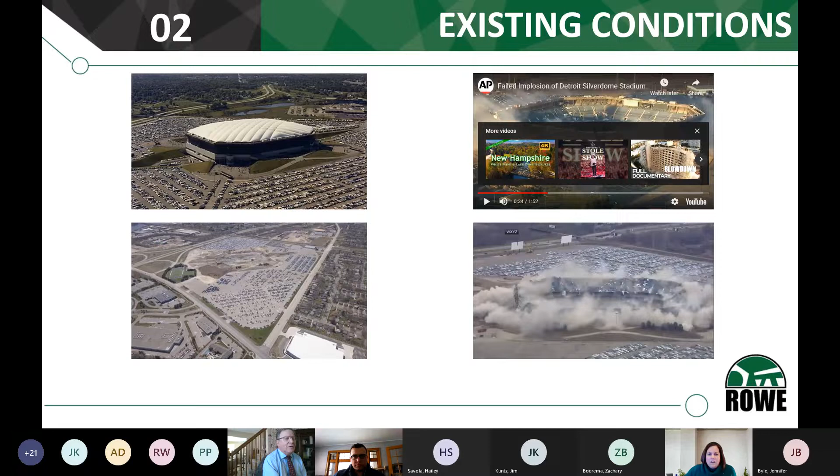But the second time around, it fully imploded. And a little fun fact here, I don't know, can you hear me Jill? Yeah, okay. Something for everyone to note: look at all the cars in the parking lot while they're blowing that up. Those cars happen to be the Volkswagen recall cars, the ones where they violated the emission standards. That's all of them that they brought back from people. So maybe they didn't care what happened to them if they got a little debris on them.

Yeah, so a few more fun facts: the Silverdome did open in 1975 with a capacity of 80,311. The roof actually collapsed three times, once in 1975, 1985, and then again in 2012 before it was demolished.

And the Silverdome, this is actually a pretty timely fun fact: Mr. Tom Brady's first NFL appearance was there. He went 1 of 3 for 6 yards, and the Lions ended up winning that day 34-9. Things have turned around for him a little bit in the past few years, I guess. The Lions were 116 wins, 92 losses, and 1 tie when they had home field advantage.

There was a record attendance of 93,682 people during a mass performed by Pope John Paul II. And the Silverdome did host Super Bowl 16 in 1982.

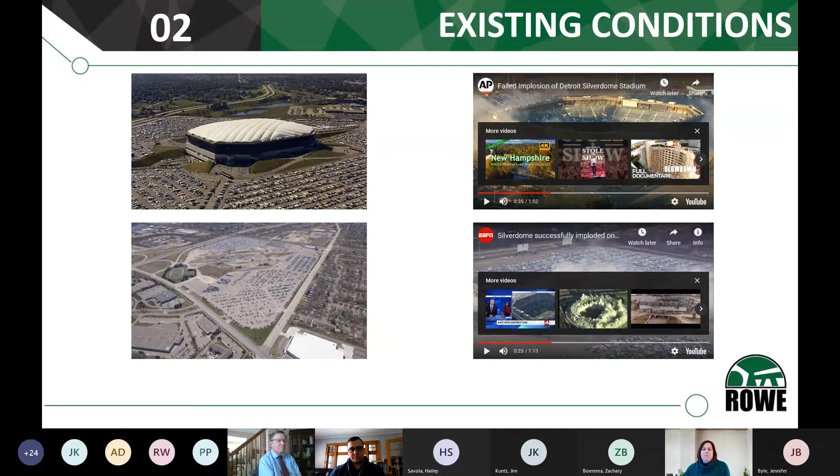But moving forward, after the implosion the proposed development came in, titled Project Cougar, which turned out to be an Amazon fulfillment center and delivery station. You can see here the fulfillment center and delivery station on site. This was the first time both facilities would have been constructed on the same site.

There's 823,000 square feet for the fulfillment center and a 200,000 square foot delivery station. This site is expected to generate over 1,500 jobs. Yes Joe, the fulfillment center is three stories, so it's correct, 3 million something - that's just the footprint, 800,000. So here's a little vision of what it was going to look like once it was developed.

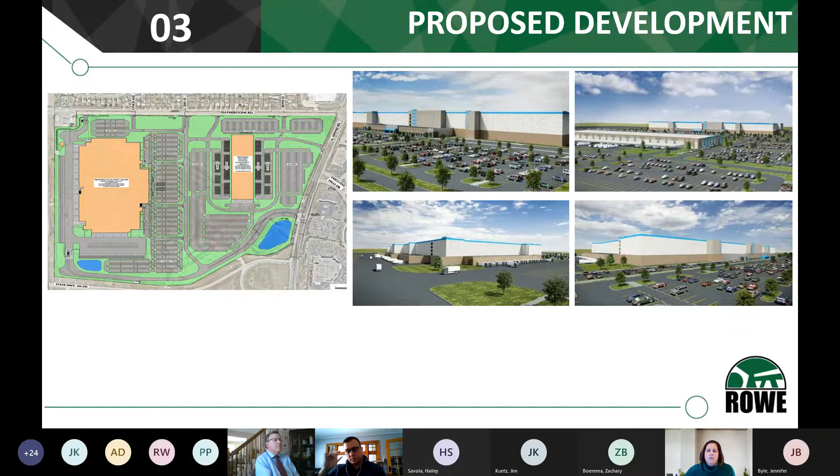So we were tasked with creating a scope, and this happens to be a pretty unique site as it sits along M59 in Oakland County. Opdyke Road runs along one of the frontages, maintained by the Road Commission for Oakland County. The city of Pontiac is where the site is located, but just across the street is the city of Auburn Hills. So some of these intersections had multiple agencies with interest, and we were talking to the Michigan Department of Transportation, the Road Commission for Oakland County, City of Pontiac, and City of Auburn Hills.

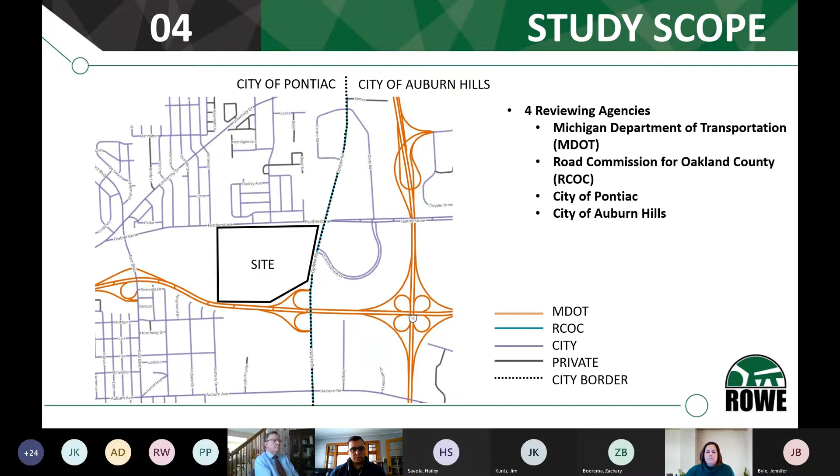So we ended up developing our study intersections, which ended up being 19 intersections in total, 5 of them new site driveways. We were looking at the Opdyke Road corridor, just south of the M59 ramps, north of the intersection with Featherstone, along the Featherstone corridor, and also the Martin Luther King Jr. Boulevard corridor, taking into consideration the ramps at M59. We even extended along University Drive to where M59 ends up becoming a local road going into the city of Pontiac. So it was a pretty large study area for this.

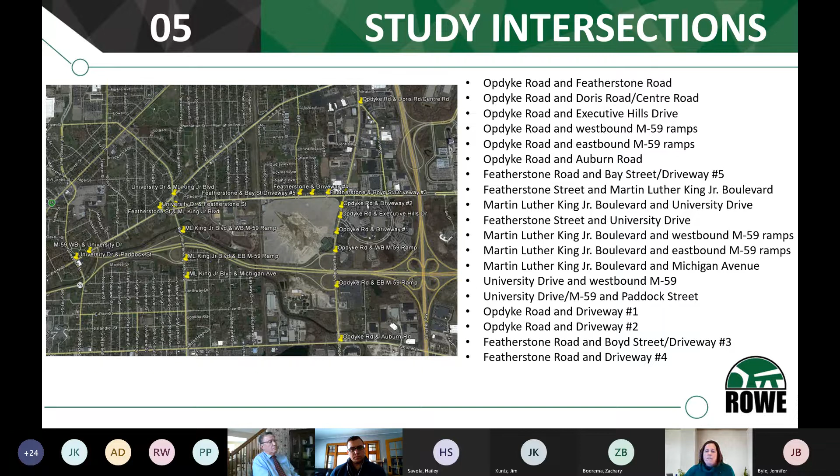There were some unique elements. When we were out there collecting our traffic counts in August of 2019, there was construction on I-75 and the M59 ramps. Those loop ramps were closed all summer, so that meant different traffic patterns.

The Road Commission for Oakland County uses the SCATS system, which stands for Sydney Coordinated Adaptive Traffic System, which allows them to collect traffic data every day, all day long. So we were able to go back and look at intersection data from May of 2019, which we could then compare to the August counts we had taken, and see where some of that traffic balanced out and where there were impacts. The eastbound off ramp onto Opdyke Road, for example, had a significant increase in traffic that we knew would change once those loop ramps were open.

This was the first site for Amazon that had both a fulfillment center and distribution center on the same site. So there were a lot of reworks of how those buildings were going to be laid out on site and how traffic was going to be coming in and off site.

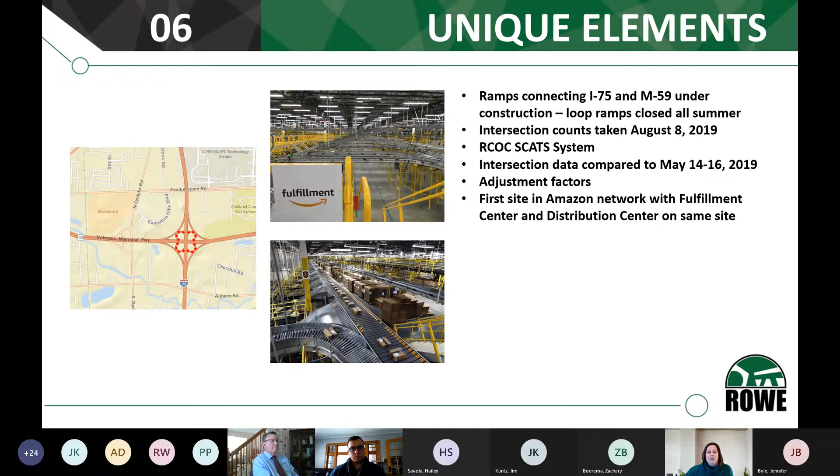Because Amazon is the beast that it is, and they have these facilities all over the country, typically we would go through and use the ITE trip generation manual, which has followed various site studies over the years to develop their trip forecast. But in this case, we were supplied information from Amazon because they have their own charts based on similar facilities.

They're very strategic about when their employees are coming in. They make sure their trucks are not also scheduled to come in at the same time. They want to make sure their employees are getting to work on time and leaving in a timely fashion, so they'll do some of their own on-site traffic management to make that work out better. They provided us with their peak and off-peak hours as well, and they try to avoid that roadway peak hour, so they have employees entering and exiting outside of your typical 7 to 9 or 4 to 6 peak hours.

So we took a conservative look at this. We wanted to look at the worst case scenario, and we also made sure to look at that holiday peak, which they see from November to January, just to make sure the improvements we would propose would still be able to handle that traffic.

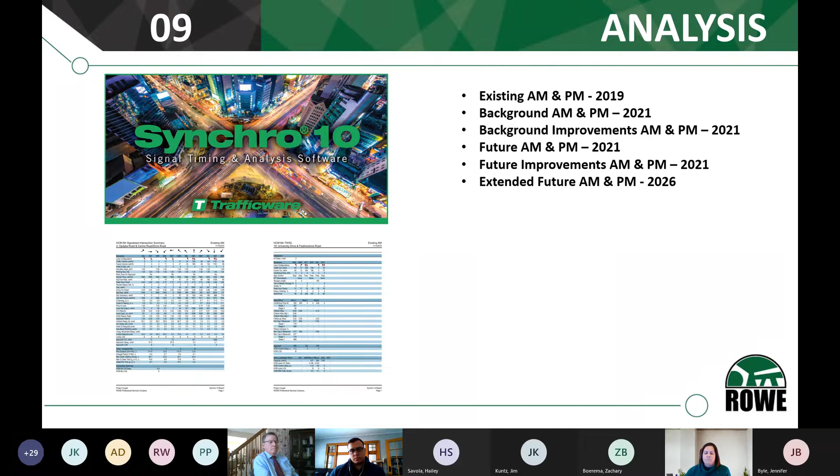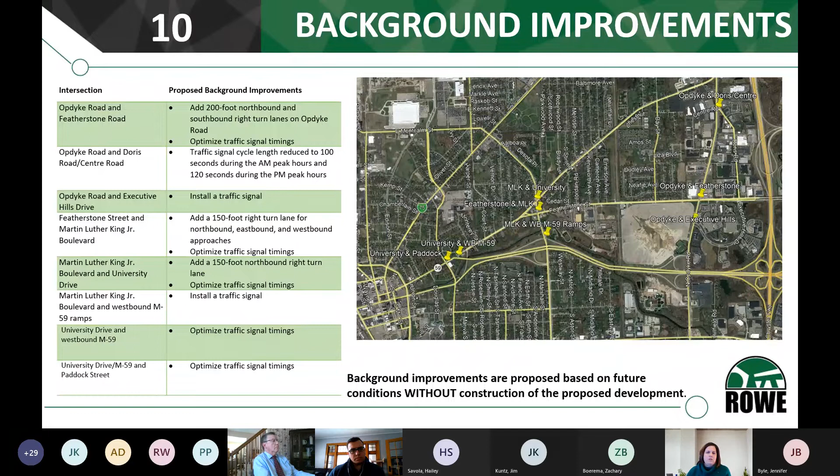Then we moved on to our future improvements. Once construction was completed and the development was done, we considered that those background improvements would have already been implemented. In this instance, there was signal optimization needed at some intersections. We had a proposed widening on Opdyke Road to allow for dual lefts into the site, a traffic signal at the main site entrance on Opdyke Road, and another proposed traffic signal at the site driveway on Featherstone at Bay Street.

There were also proposed alterations to the M59 ramps, with changes in signalization and a widening of the eastbound off-ramp, since a majority of that traffic was going to be accessing the site from that ramp.

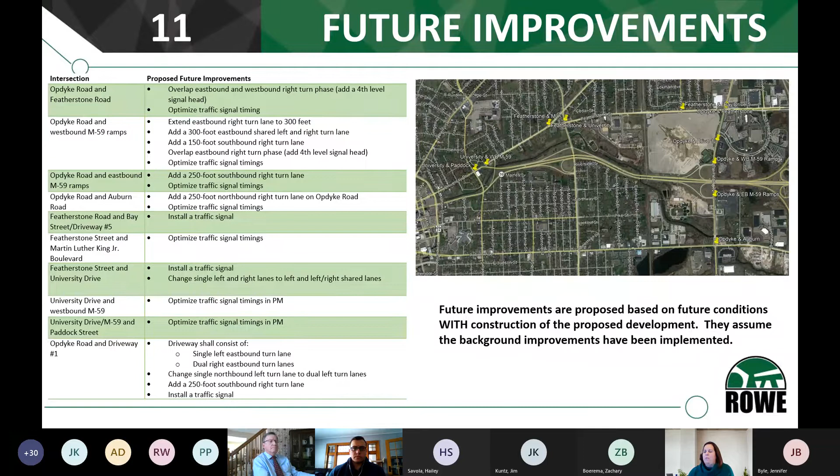This made for a bit of an aggressive construction schedule, working with 4 different agencies who had input on things they wanted addressed. With the city of Pontiac, there were pavement improvements done on Featherstone Road. Even though the project wasn't within the city of Auburn Hills, they share right of way at the intersection of Featherstone and Opdyke. Having MDOT and the Road Commission review the improvements and construction plan didn't make for a lengthy review process, but there were definitely some interesting conversations.

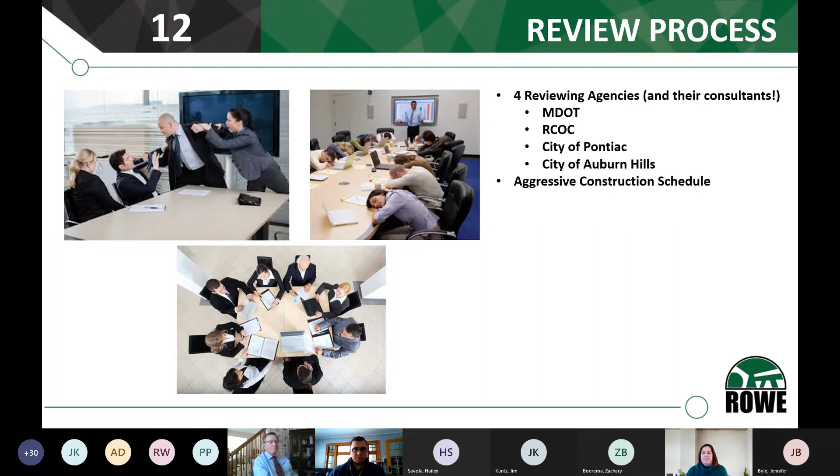In the end, the project was approved. We were able to come to agreements with all the agencies.

Even though our traffic data collection happened during large construction projects, this actually helped us this past year once COVID came around — we ended up applying a lot of the same ideas, looking at other developments where traffic volumes were much less than what had been seen in the past, and wanting to plan accordingly for when those volumes get back to pre-COVID levels.

It was definitely an aggressive construction schedule. They're still working towards it, with a couple of signals left to be constructed as part of this project. It was definitely a one-of-a-kind facility, working with the trip generation being provided by our client.

There were some site layout restrictions when they were trying to lay out those buildings, due to leftover Silverdome debris. Most of the Silverdome structure and superstructure was part of the fill, which created some problems going forward with where they were going to place a big new building. So they had some troubles with that.